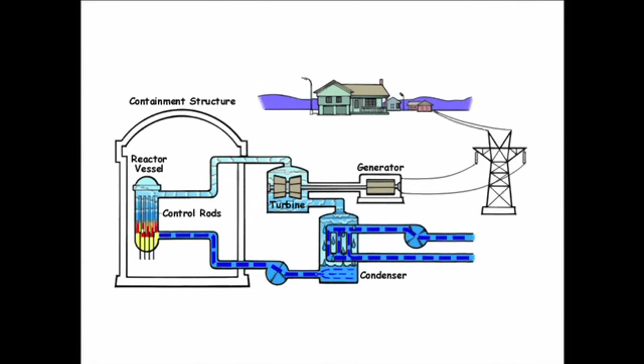You take it to a turbine, a little propeller, that converts some of the energy of the steam into rotary power, which turns the generator. The generator makes electricity. The steam is actually very valuable water — you don't want to lose that. It has to be converted back into a liquid in order to be heated again.

You lose about two-thirds of the energy value in converting it back, and you do it by running it over some pipes. On the inside of the pipes, you have cold seawater, and then you pump it back in for another pass. The reactor has fuels, and there are control rods that have to come up from the bottom in this design to shut off the reaction when you need to do that.

When the reactor shuts down, there are big valves that close over the steam loop, so they keep the reactor bottled up in the containment building. In normal operation, you're letting some of that radiation out, that radioactive material, because the loop has some radioactivity in it. The coolant water is performing actually different functions.

It also acts as a moderator, which means it slows down the neutrons as they're emitted in the chain reaction, to its optimum speed for splitting more uranium nuclei. The reason some people like boiling water reactors is liquid water is a very good moderator, while steam is not a very good moderator. You change the efficiency by changing the proportion of steam bubbles in the core, and you can do the design around that.

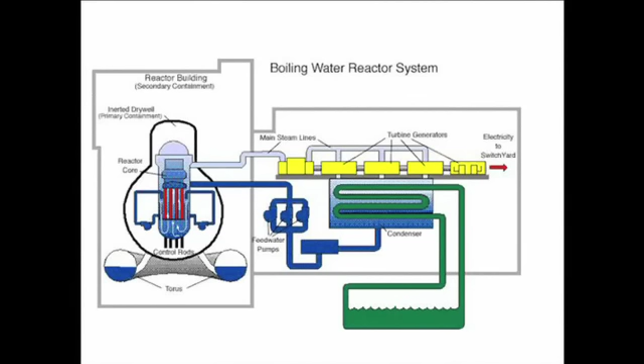One of them is at the bottom, that circular part we're looking at in cross-section. It's called the wet well, or torus, and it's half full of water, about 1 million gallons. It fills up with surplus steam when you vent it. That worked well at Fukushima until they had so much surplus steam that they overwhelmed the wet well.

There are two methods for primary containment cooling of the reactor. One is just what we discussed, the simpler one: pump the steam off, you can see the main steam line goes to the turbine generators, back through the condenser, and then is pumped back in for another pass.

The other method is for when you shut down but are still producing heat. At the moment of shutdown, you're producing about 6% as much heat as when you were running, because you've got lots of very short-lived fission products. Over several seconds, minutes, and hours, as the atoms seek stability, they throw off a gamma ray or an alpha or beta particle, giving off heat. It decreases pretty quickly, but you have a very substantial heat load at the beginning, and the shutdown cooling works by pumping water out into the condenser through a loop, not quite shown here, and then back in again.

They lost the ability to do that when they lost the diesel generators. When the tsunami came in, an hour after the shutdown, the control rods were in place, there was no nuclear reaction, but they lost the ability to remove heat, and that's where their troubles really began.

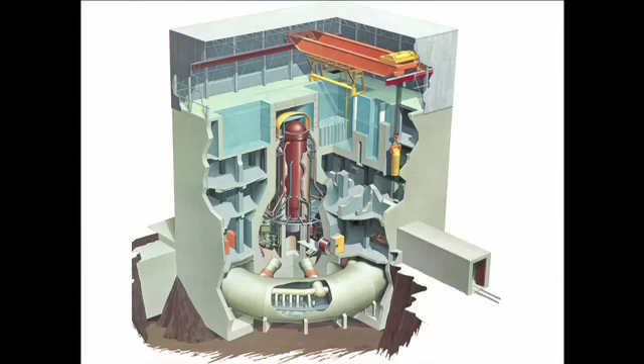We also see in this picture the spent fuel pool. If you see the head of the reactor, to the right of that is the spent fuel pool. The way you refuel this thing is over the head of the reactor: we've got a lid on the primary containment, and over that, some concrete blocks. You use the crane, shown here parked on the right, that red thing. It rolls over, picks up the blocks, removes the top of the containment, removes the vessel head. All that has to be done underwater because the radiation field is so high, so during refueling, you flood the area over those blocks. The crane then plucks out individual fuel assemblies and moves them over to the spent fuel pool.

You may have heard that one of the problems with this design is that the spent fuel pool is up in the air. This has some advantages: you're able to move the stuff quickly, so the amount of time spent moving each individual assembly is quite short, which keeps your outage short. The disadvantage is that in case of an earthquake, or in case of Mohammed Atta in a 767, or various other problems, the theory is that that pool is a little more vulnerable.

Here is a good image of both the primary containment and secondary containment—we're looking at a cutaway view. The secondary containment on top is the thing that blew up when they had hydrogen they were trying to vent from the primary containment to the exterior, but it ended up in the secondary containment instead. Before you can clean this up, before you can defuel that reactor, you're going to have to rebuild that secondary containment.

These are our fuel assemblies. I showed you previously my show and tell, our little pellet here. The pellets sit in those rods. The rods are bundled together, and the whole thing is wrapped in a zirconium sheath—both the rod and that bigger wrapper.

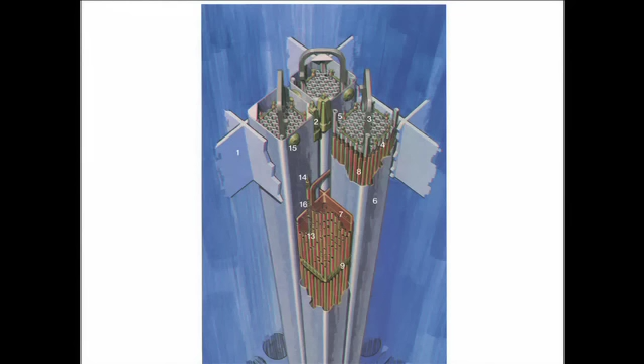Zirconium is not chosen for its strength, and it's not chosen because it's chemically inert—it ain't. It's chosen because it's transparent to neutrons, and the whole purpose is to multiply the population until you have a lot of neutrons that will carry on the chain reaction. This is what, by the way, sits in spent fuel pools.

This sequence, I think, was circulated by the Nuclear Energy Institute, the industry's main trade association. Top left: core uncovered. Usually you have the whole core bathed in water, or some mixture of water and steam, in which it's mostly water.

The core uncovers, the zirconium clad starts to melt, and those little pellets start falling out. So we go from core uncovered to, in not very long, fuel overheating, and then we get the fuel elements slumping, some of the pellets falling to the bottom, and we get this molten mass in the middle.

Looking across the bottom, you see the first slide, which we hope is still our case: we get core damage but retained in the vessel. The theory is if you go long enough, some of it's going to melt through into the lower reactor pressure vessel, and then possibly even get out of the containment.

One of the problems is the zirconium clad and those zirconium channels react with steam and give off hydrogen. They go through a sort of rust-type reaction—they dissolve into a powder and give off hydrogen. If you have oxygen handy, you will get an explosion.

As I said, I'm showing you a variety of schematics of differing complexity. This one—the point I wanted to make is you introduce cooling water on the outside, it goes down to the bottom of the vessel, flows up through the core, and then you get the steam out the top.

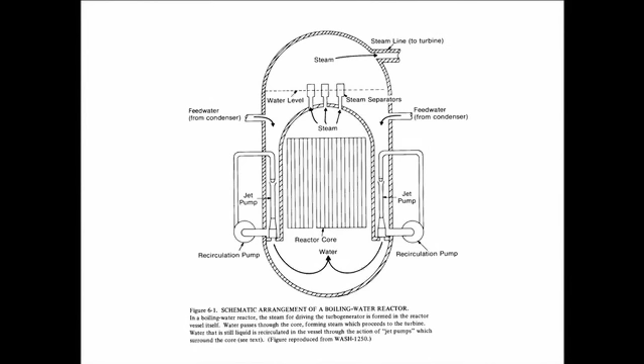The problem with this design is once you mess with the geometry of the core—once you've started melting it, like a bunch of little birthday candles parked too close together and melting each other—once you get to that situation, water's not going to flow very well. You have hot spots, you have molten areas. Once you start dumping some of the core into the bottom of the vessel, that's going to be a problem too, to keep it cool.

Once you start putting in salt water, because that's all you have handy, you have an additional problem: you're not removing heat from the salt water, you're actually boiling it away to keep things cool. It's called feed and bleed—like a pot of boiling eggs on the stove, and for some reason you can't turn the stove off, so you keep putting in more water. All that heat goes up as steam, and you're concentrating the salt. The salt is going to start to mess things up and block things up.

Now we have an additional problem: they managed to overpressurize the whole system in the first few hours. You see the things labeled jet pump on either side—there are recirculation pumps that are actually located a little lower down toward the bottom than this schematic indicates.

They blew the seals on those, which means you've got reactor water leaking out of the vessel into the primary containment, and possibly bits of fuel that have been atomized or broken up into suspension. So we're starting to spread our fission products, all the things the uranium was broken up into, the highly radioactive stuff—cesium, strontium, iodine, etc.—over the whole plant.

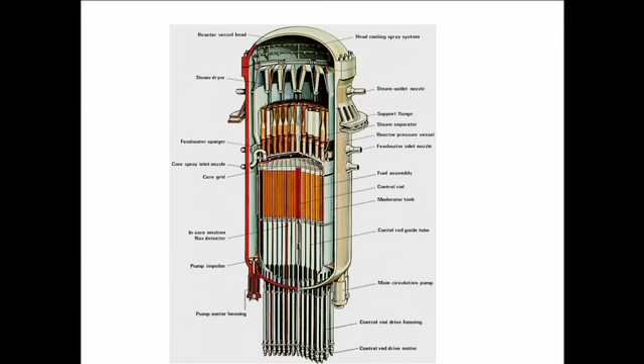This is a good view. At the bottom we've got the control rod drive motors. The control rods actually live in the vessel, but there's a penetration at the bottom of the vessel for each of those shafts that's going to push the control rod up between the assemblies. Those are potential leakage points, and there are many other potential leakage points.

We've got the core grid, which is no longer a grid. One of the theories is you get the fuel slumped together, and then you get a renewed chain reaction. You have no way to stop it because you don't have geometry anymore—you can't insert the control rods.

It's a matter of conjecture by engineers whether that's actually possible. That's where the idea of the China syndrome comes from. You get the core to become a molten mass at the bottom, it burns its way through, and obviously the term China syndrome was invented by Americans. If it melts all the way through to the center of the earth and comes out the other side from Japan, it's not going to China.

I have an editor who lives in Baltimore who's very concerned about this. So I told her I looked it up, and actually it comes out in Baltimore. In reality, it comes out somewhere in Brazil. But I don't think we're going to get a China syndrome.

I think there's scattered evidence for inadvertent criticalities—little pockets where you can get a renewed chain reaction. That produces lots of heat, steam, energy. It blows the mass apart, and you lose your critical mass. It might be reestablished; we may be having that, we may not. It may take years to figure that out until you can open this up and see what went on inside.

Let's go on to the last slide. This is yet another view. What we have here is the primary containment. They flooded the dry well, that upside-down light bulb that's usually kept dry.

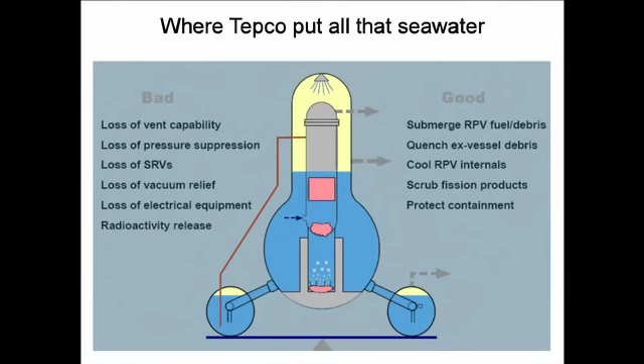They pumped seawater into it, first water and then seawater, in a desperate effort to cool the core, which is that red box in the middle, and they figured they could draw heat off from the exterior. What this shows is one potential configuration, although it's not clear we have this now. In this configuration, we've got the fuel slumping down to the bottom of the vessel, burning through, ending up at the bottom of the dry well. Down there is some concrete, and this could turn into a problem because if you heat concrete enough, it'll give off hydrogen and carbon monoxide, and those can combine explosively.

We're also looking here at the torus, which is much too full. They've been venting out of the torus. The idea was to vent to the exterior. There are some differences between Japanese plants and American plants, but I hear contradictory information about them. This was not originally designed with a vent—they added the vent later because they figured they might get into this kind of accident. They didn't want to overpressurize. American plants have hardened vents; they look like sewer pipes, and that will carry the explosive hydrogen out to the exterior.

The theory is that the Fukushima plant had vents that looked like ductwork in your house with a forced air heating system, and the ductwork ruptured. You got the secondary containment filled with hydrogen. Hydrogen will explode at a very broad range of concentrations with air. Something set it off, and poof, they blew away the external containment, leaving the spent fuel pool sitting out in the open.

Actually, I think we do have a couple more slides here. One of them is going to show the spent fuel pool—I'm sorry, skip this one, go on to the next one.

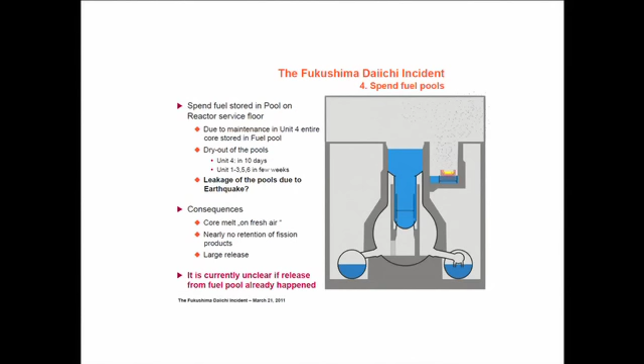So here we have the spent fuel pool on the top right, and if it was empty, the U.S. Nuclear Regulatory Commission seems to think it was empty at one point. It's generating heat, it boiled off, they didn't get any more water in there in time. The cladding on those rods also generated hydrogen, and that's how you got a hydrogen explosion in Unit 4, where there was no fuel in the actual vessel.

Now I'll give you a quick update on what's going on today. A few hours ago, the Japanese announced they're going to plan evacuations in a more leisurely fashion at greater distances. This is kind of disturbing. It's not because of acute exposures, it's because they've dumped so much long-lived radioactive material, probably cesium, in the area.

So you'd be fine there for a day or a week, but if you're going to spend year after year there, your dose will be too high. We're now talking about either a massive cleanup challenge or land abandonment, a la Chernobyl, at least in some hotspots.

The other thing is that the Japanese are preparing to upgrade their assessment of this accident on the 7-point international scale. At the moment it's at 5, which is where Three Mile Island was, and they're about to reclassify it as 7, which is the most serious, where Chernobyl was. One of the differences is most of this radiation was spread locally or spread over the ocean. Chernobyl spread radioactive materials over enormous land areas that were not very well prepared for it.

So it's more reactors than Chernobyl was. It's happening in a place where they're somewhat better set up to cope with it, although it's a mess to try to cope with a meltdown or 3 meltdowns and the spent fuel pool right after a tsunami. And that's about all I know.

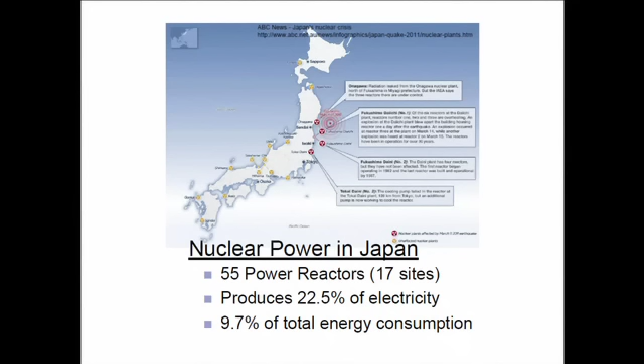I want to do a little bit more about Fukushima, and then I'm going to switch gears and talk about the future of nuclear. This is Japan. Japan has a lot of nuclear power. They've got 55 reactors. They get more than 20% of their electricity, and a lot of their total energy consumption, from nuclear. Japan likes nuclear because Japan has no real sources of fossil fuel, and they're all concerned about their national security.

So we had the earthquake. One of the things that people don't understand about this earthquake is that it was, in fact, within the design of the plant. The design basis for things like this is not earthquake magnitude, it's acceleration. The ground moves, it shakes. Does the thing fall over? This was within the design.

A magnitude 9 simply meant the shaking went on for longer. So it's not that there was any screwup here in the design of the plant as far as the earthquake. The problem was the tsunami. Their seawall was only 20 or so feet high. The wave was 45 feet high. Why that was done, I don't know. And there you got all the trouble.

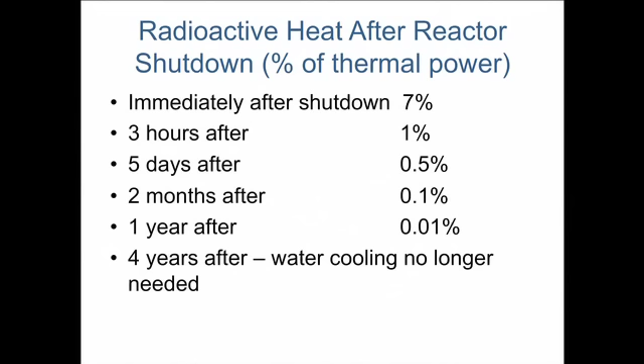As Matt said, you've got to keep this fuel cool even after you stop the reactor. Right afterwards, 7%. A year afterwards, 0.01%. And that fuel has got to be kept in water for 3 to 4 years before you can take it out and not worry about it melting itself.

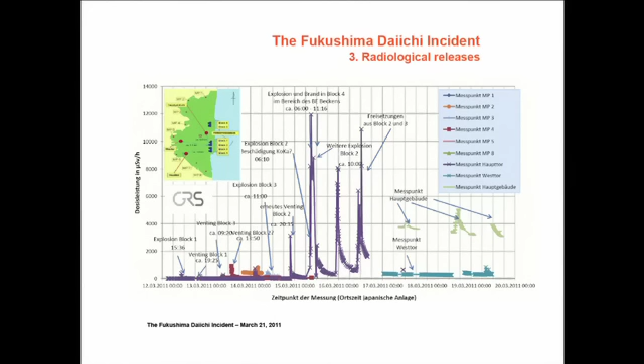This is a look at the radiation release that goes with all of the explosions. Every time you saw a hydrogen explosion, you see a big spike in it, and the spikes go way up above what is the normal background radiation. The average background in the US is about 0.3 microsieverts per hour. This is microsieverts per hour, so way down.

Let's see if this thing works. It does. Way down here at the bottom is the normal background. You can tell what's failing because of the signals you get from the radioactive material. When you start to see things that only are produced as fission products, you know something has broken. The first thing that goes bad is the cladding, and then you get the gaseous products released, those with high vapor pressure, and then the fuel itself begins to crumble, and now you get different materials out, and you can keep pretty good track of it.

As of now, the radiation levels, as Matt said, are low. But it's not the radiation levels, it's the problem of living with things for a long time and ingesting radioactive material.

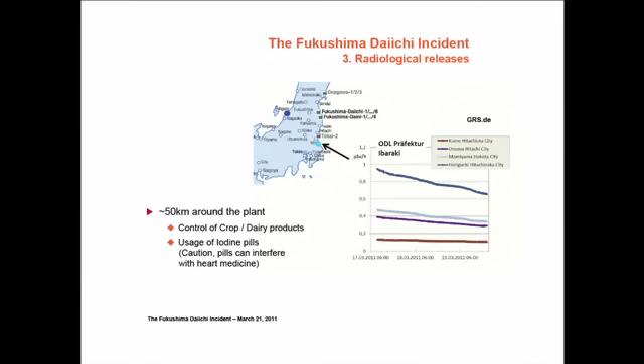The danger from another explosion is low at the moment, and the amount of additional radioactive material that's likely to be deposited off-site is small. Now, for the students and for the people interested, I've included a couple of slides of information sources and references for those of you who want to read more about this.

Now I want to switch gears to the future, and I want to start off with nuclear accidents. Matt doesn't know where the term 'China syndrome' came from. It's actually the title of a movie with Jane Fonda, and the movie came out within 2 weeks of 3 Mile Island, and the scenario was just as Matt described it. The fuel melted, the fission went on in this lump, and it slowly melted its way down through. I don't remember how Jane Fonda saved the world, but she and her hero did, and if she remembered, maybe they should send her over to Japan right now.

So we had two very big accidents before. 3 Mile Island, partial core meltdown, containment buildings, little radiation off-site. And if you want to read more details, that's the URL of the Nuclear Regulatory Commission's review.

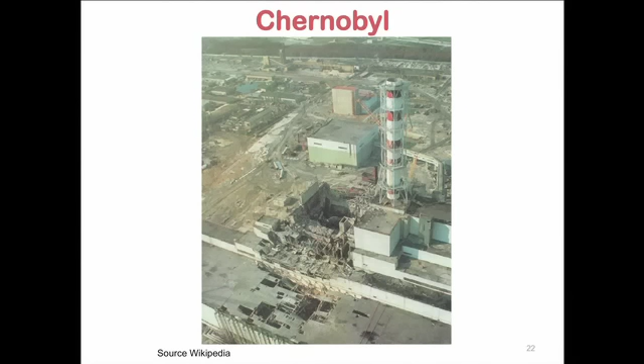So after Chernobyl, safety reviews and improvements in the RBMK, the Chernobyl-type reactor, were undertaken by Russia and the IAEA. Many of them were shut down, others modified to improve safety systems, and in fact a lot of the money for that came from the European Union and the United States to fund cleanup in the states of the Soviet bloc. Russia handled its own. INPO went international, and now we have the World Association of Nuclear Operators, WANO. I don't know whether anybody calls it that, but that's it.

Now we had one more thing, which wasn't a nuclear thing, but it was 9/11. That caused extensive reviews for the adequacy of containments if they're hit by aircraft, security of the plants from terrorist attacks, and substantial improvements in security. Most of that is classified because they don't want the terrorists to know what the new security things are. Some auxiliary systems are strengthened, and now any new plant has to have security from an airplane crash.

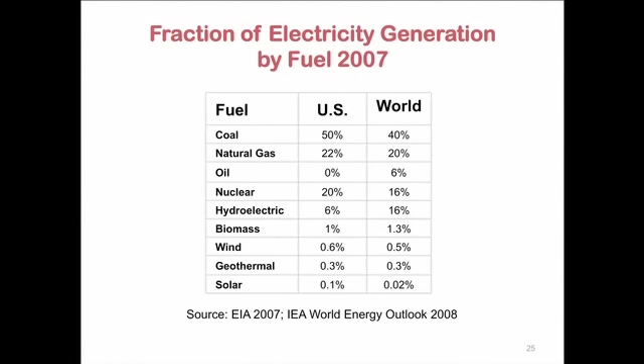Now let's look at the world. If you look at the world and look at electricity generation, coal is the big thing, gas is next, then nuclear is the next big thing, 20% in the US, 16% worldwide, and then after a big hydro, much lower values for the renewables.

Nuclear reactors are all around the world. There are about 400 of them now. Of that 400, roughly 25% are boiling water reactors like the one at Fukushima.

In 2009, when I got this data, there were 435 in use, 28 under construction, and 200 planned. Now there are more operating, 58 under construction, and still more planned. Nuclear had become a big thing.

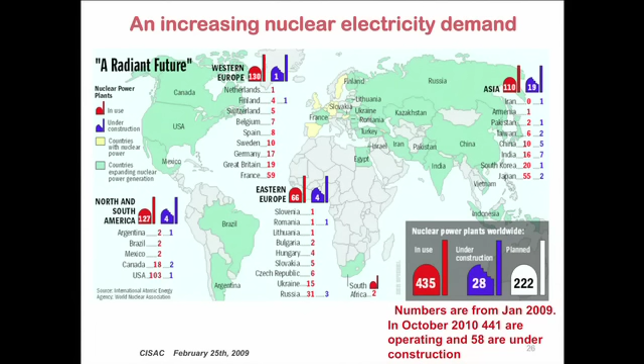Nuclear became a big thing for different reasons depending on where in the world you were. In Asia, what you saw was a desire for energy and national security. They wanted to go nuclear to get more electricity without having to import more stuff. China, by the way, has to import coal now, even though it has coal supplies and a lot of coal-fired power plants. So China had a good reason to do it.

Japan and Korea were continuing their increase. A lot of countries new to nuclear were talking about them, and in fact some of these countries have already put in purchase orders for new reactors.

In the US, nuclear power plants are prepared for extreme events. The criteria are set by the Nuclear Regulatory Commission, which was split off from the then Atomic Energy Commission, now Department of Energy, many years ago when people became worried about the regulators and the promoters coming from the same agency. This is the problem in the oil spill in the Gulf — the people who regulated the drillers were from the same agency that promoted the drilling. Bad idea.

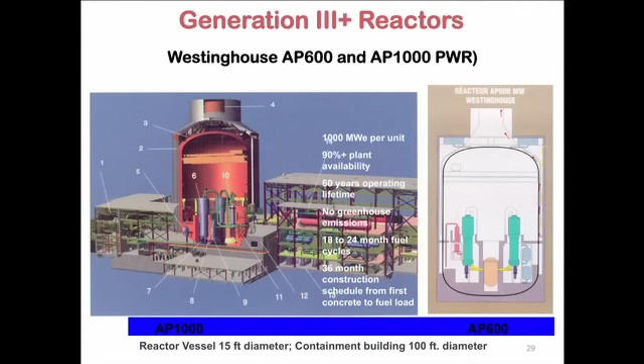One of the things you should also know is that there's general agreement in the world that the US Nuclear Regulatory Commission is the gold standard of licensing and regulating reactors. Even the French agree our system is much tighter, and I say even the French because they get 80% of their electricity from nuclear, and they also have one of the leading manufacturers of nuclear reactors.

Everybody is going to toughen things up. I think we need to keep this thing in perspective. And there are two perspectives you should think about here.

One perspective is a tsunami. There are already 14,000 dead and another 14,000 missing. There'll be 28,000 people killed in this. The only people killed so far in the reactor accidents are two people inside the building, and they think things fell on them. They don't know yet what they died of.

So you get 240 from natural sources. 40 of those come from radioactive potassium in your own bones. How much you get depends on how big you are. A 160-pound man gets 40 millirem. Medical gets another 60 on average. So typically it's 300 averaged in the Americas. And a nuclear plant emits practically nothing. Nuclear plants and coal plants operating together are about the same.

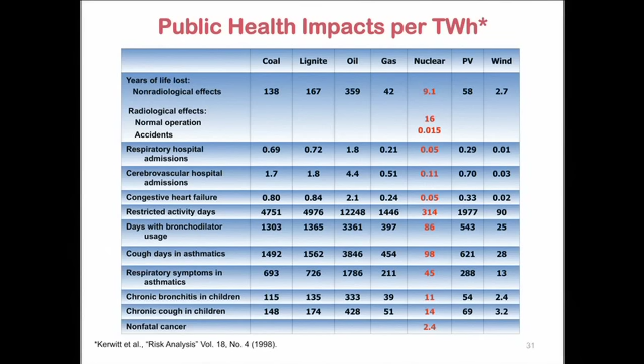An analysis has been done. This was done in Germany. You can see the reference in the corner. They looked at all of the sources. This is cradle-to-grave health risk. Cradle-to-grave means from mining to transport to making ore to doing whatever you have to do, to using the stuff, to disposing of spent fuel or ashes from a coal-fired power plant or what have you.

And if you look at this, the conditions required here are what the European Union requires for emission controls. There's a new one that's been done by the U.S., for the U.S., which doesn't handle as many things. It only looks at fossil fuels versus nuclear. But the general conclusion is the same.

If you look at years of life lost, you find nuclear sitting over here, and the only thing better than nuclear is wind. Photovoltaic has more years of life lost per unit of energy. And then you can find all sorts of health problems down here. The moral to the story is that the issue is...

What is the hazard? Now, we got a funny thing with people. We're all people. We get scared of things we don't understand, and we're also scared of things which do a lot of damage in a very short time.

We all drive cars. 30,000 people every year get killed in automobile accidents, but that doesn't make us ban automobiles because we all feel we're in control. Nobody feels they're in control with a nuclear power plant, and they don't realize they're not in control either with a coal-fired power plant or with the manufacturing of photovoltaics or whatever one you want to pick.